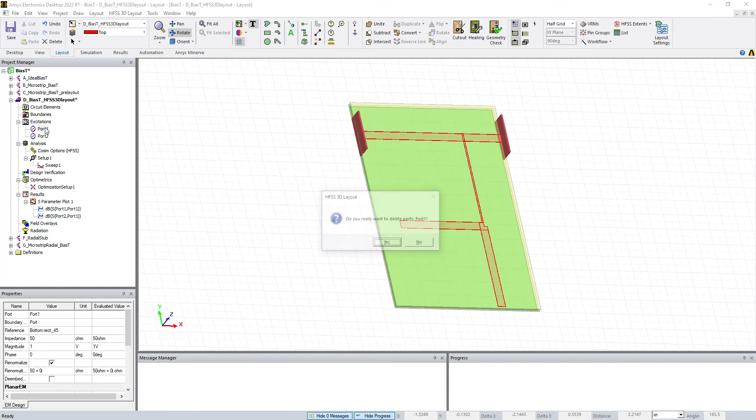Then we're going to need to go back to our ports. Let me just rotate this so we can kind of take a look at them again. So we're going to remove these ports because we're going to add connectors to them. So go ahead and delete the ports.

So now we're back to our printed circuit board. And we need to add the ground pads on either side that we're going to solder the connector to.

And if you had uploaded the personal lib contents to your personal library, so that means if you go to now my personal lib is right here, you should have these guys right here, this MW class, and then you may have thrown this ground pads bitmap into the proper directory.

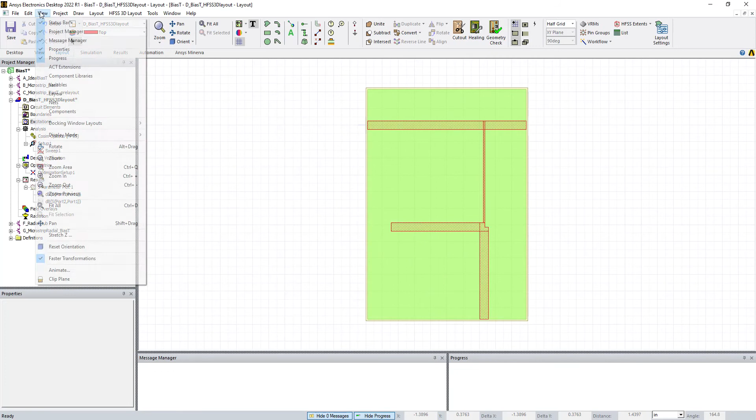If you had done that and we say view component libraries, you should be able to go to your personal library here, personal library, and you see this thing, and you see this ground pads. So I've already gone through the trouble, which was a real pain in the butt, of creating these ground pads, and you'll see how easy it is to add.

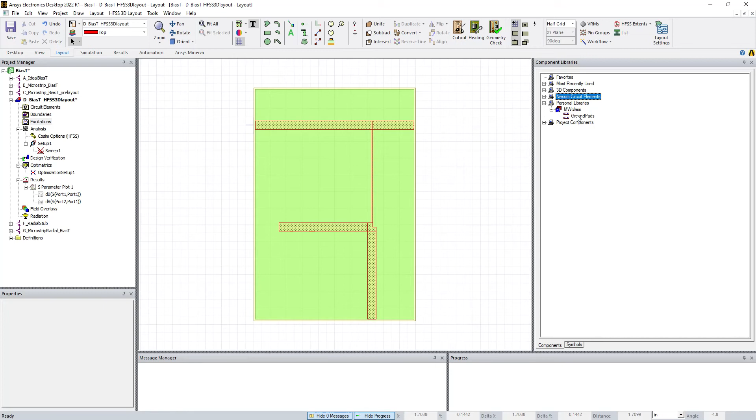So you just double click it like a regular component, and let me just verify our layout settings and snaps are right. So we have display, 100 mil, 50 mil, snapping, vertex, edge center.

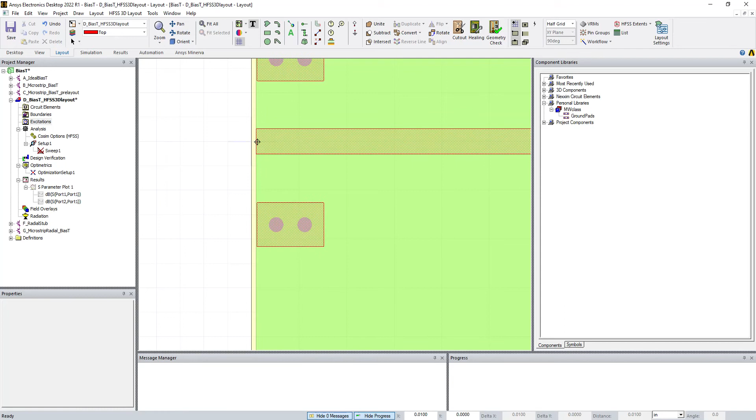All right, so double click on ground pads, and it's going to want to snap right to the edge of the end of the line. So we're looking for the triangle. Where is it? Oh, I almost had it.

Okay, so it snapped right to the edge there, and now you know why I have this connector offset. So this edge of the connector pad comes right to the edge of the board. So we're going to do the same thing over here. Double click on it, and since it's a component, I can hit that R twice to rotate it. We're going to look for it, and bam, that's it.

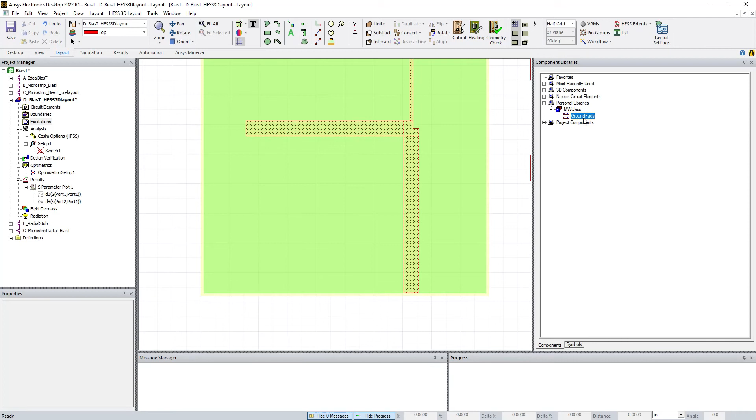And let's go ahead and add one down here too, in case you'd want to add one for the bias port, in case you want to put like an SMA connector there to add for the DC voltage bias. All right, so now Control D is in delta.

There we go. Okay, now we have to add our connector. So here's what we do. This is the best way that they were suggested to do it. So we're going to do the same way.

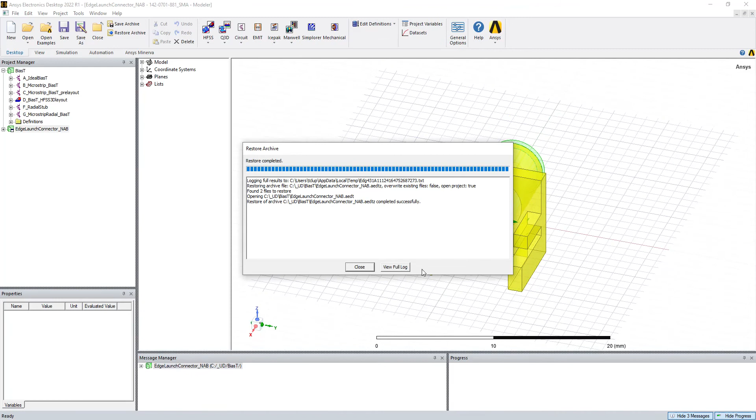So you're going to go File, Open, making sure you're going to go to this archived thing and say Open it, and just say OK for this. It's going to unpack it and open it up as a complete separate project. And say Close, and there's the connector.

So what it did is open up as a separate project. Now I've gone through and already generated this from basically from scratch, from dimensions and the data sheets. And we're not going to discuss too much about doing three-dimensional HFSS modeling in this class.

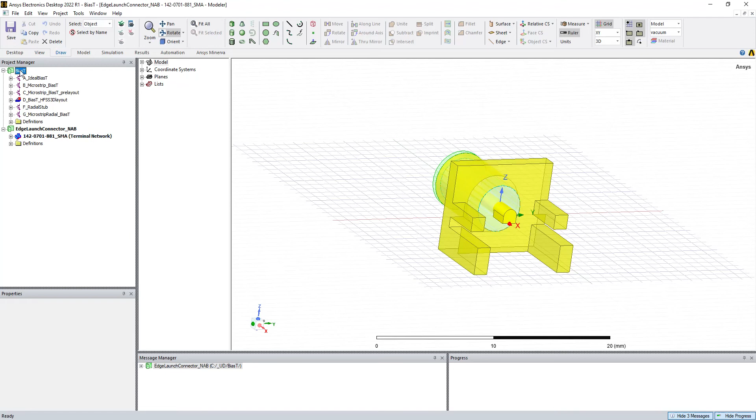So what I want you to do though is go over here, and this 142, this guy right here, you're going to click on it, right click and say copy, go over to your bias T and right click and say paste. And what that's doing is pasting it into your project, since this is a separate project.

So now you can go back and close this one you had just opened. This is the easiest way to incorporate this connector into your project, and now we have this connector in our project.

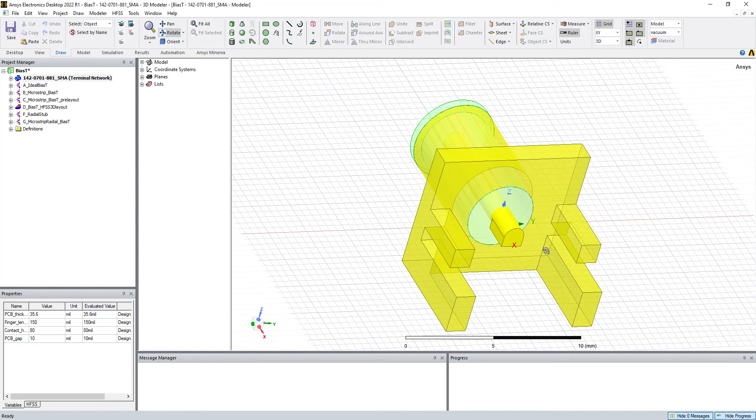So we have these lengths for the ground tabs, and we have this little feature here, something I added to kind of simulate solder going down to the center conductor. Again, I'm not going to talk too much about that.

Let's go ahead and close all of our windows, and go back to our 3D layout. Double click on that. Now we're going to add the connectors to it. The way you do this is you just click on this and say copy, Control C, come down to your layout and go Control V or paste, and just say OK.

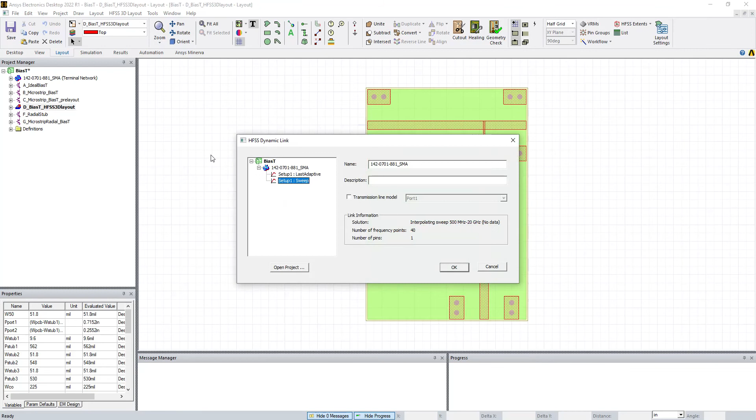It should paste it to the 0, 0, ironically, which is where we want the first one, right there at 0, 0. So we're going to do the same thing again: Control C, then Control V for paste.

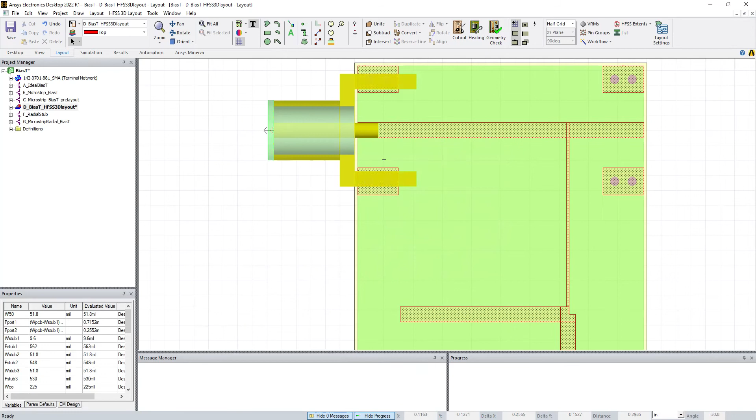Let me zoom out a bit here. And we're going to need to rotate it. It's not where I want it.

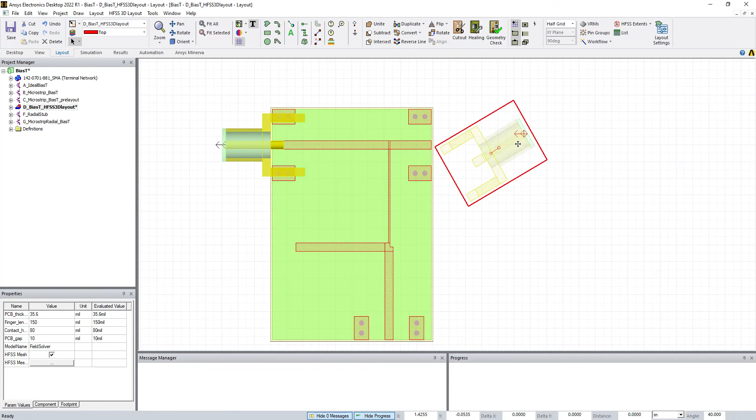Here we're going to hit Control R to rotate it around, and we're going to drop it on the edge of the board. See, it's too far over. It should go right there. Now we can check the footprint to make sure that it did, yep, so put it at 1 inch and 0.

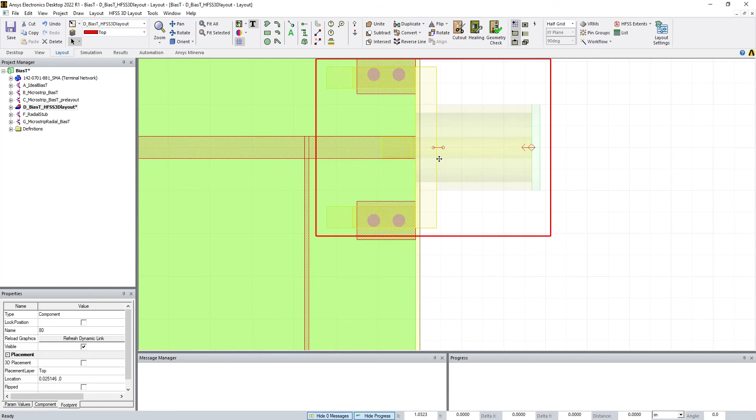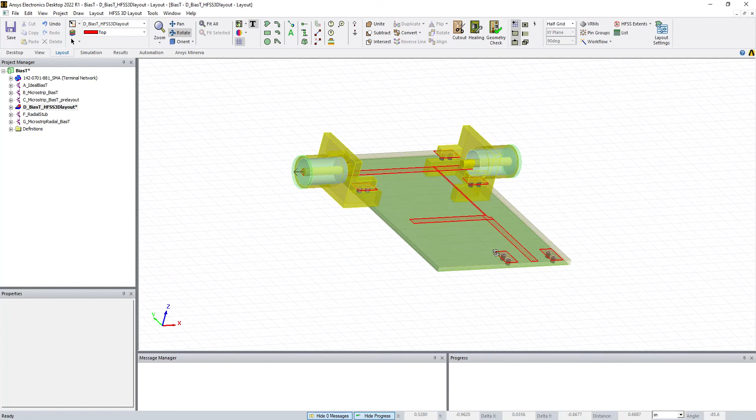Okay, there we go. So you should see the little dielectric gap right between there. Control D. And if you rotate it, you'll see the connector attached to your board, which is kind of neat. You also see the ground vias that are there. They all came with the component placement.

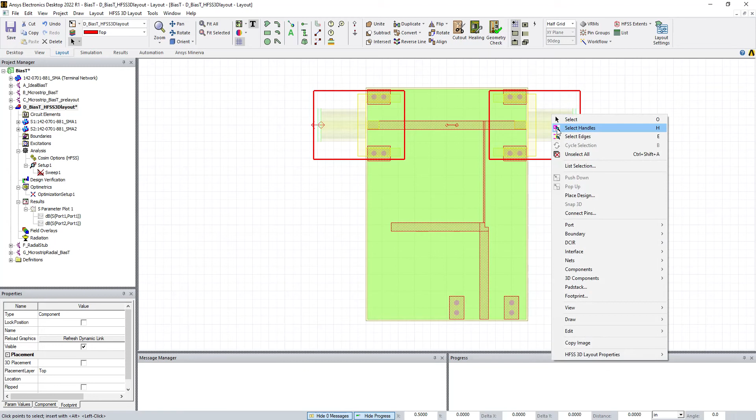And now we are ready to add the ports. So what we're going to do is now we have to add the ports. They're going to show up at the end of the SMA connectors. So what we do is we click on each connector, right click, go down to ports, and say create ports on component. Now this only works if you've already created the component such that it will accept a port on it, and I've already done that. You click on no net and say OK, and now we have 2 ports on the edges of the connectors, so we're all set, ready to go.

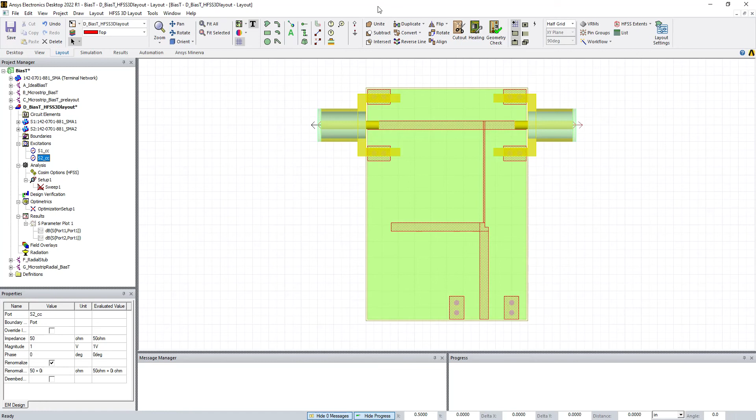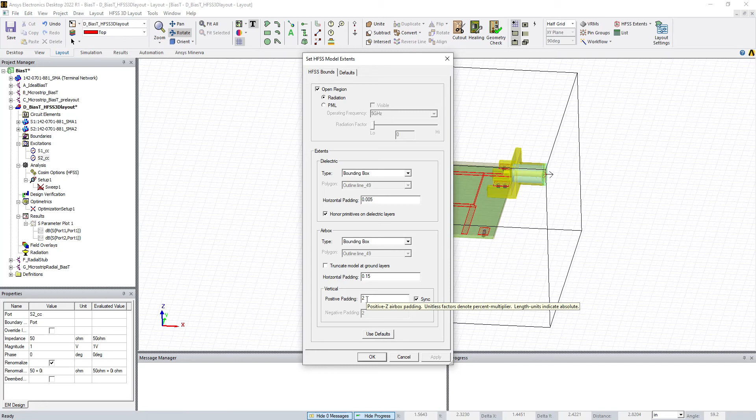We can look at the HFSS extents to see where the air box is now. So the air box is there, it's a little big. If you wanted to, you could probably change this to 1, or the positive padding, change that to a 1 if you like, but I'm just going to leave it the way it is for now. That just gives you an idea of what the actual simulation space is.

And now we should be able to go ahead and run the simulation. So let me just take a look at the sweep, I think I still have it. I put it at 10 megahertz to 4 gigahertz, so we're going to do a full sweep. I'm going to pause the video while I do that.

So again, you just click on Setup and say Analyze, and it should go ahead and do the full 3D analysis, and I will pause the video. Okay, the simulation is done, so let's go ahead and take a look at the output.

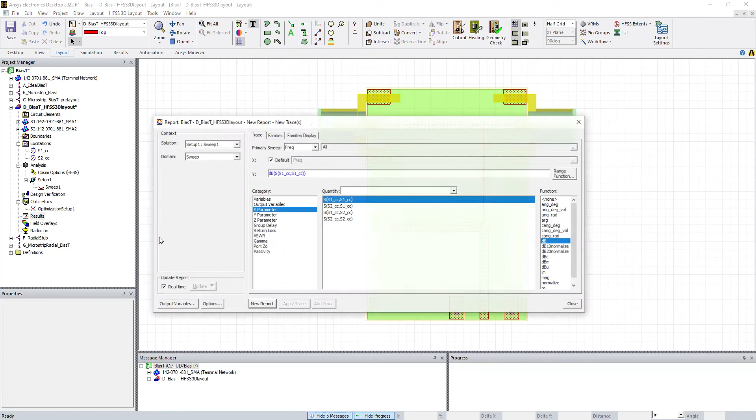Now, these are from the old S parameters, so we're just going to delete this plot and create a new one, a standard report. So you have the new definitions, the new ports are there, so S11 and S21.

And of course, it didn't change much because the connectors are well matched, but it just gives you an idea that you can actually do a full 3D simulation, including the connectors, in your project. So this is the final result, this is what you should see when you solder the connectors on and do your simulation.

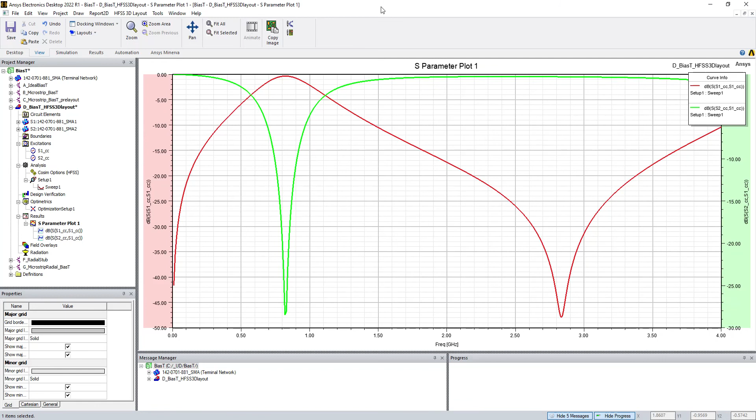The actual board would look like this when you solder your connectors on, and eventually you would attach probably another connector or just a pair of wires to your power supply to add the biasing to it. So ultimately what we have here is a transmission line that goes from one connector to the other, and this little circuit here lets us apply a DC voltage to this line without influencing the RF path insertion loss of this line.

Now, it kind of goes without saying that normally you would have a DC blocking capacitor on one side or the other. We don't in this project. You can actually buy for about 20 bucks a nice SMA pin to socket DC blocking capacitor packaged up if you wanted to go ahead and use this in an actual circuit.

Okay, so that's the connectorization part of it. Now what we're going to do is create the Gerber files, and if we did everything correctly, it should go pretty straightforward. Let's do this. I'm going to say View Layers, and in the top layer I'm going to turn off the components by doing that.

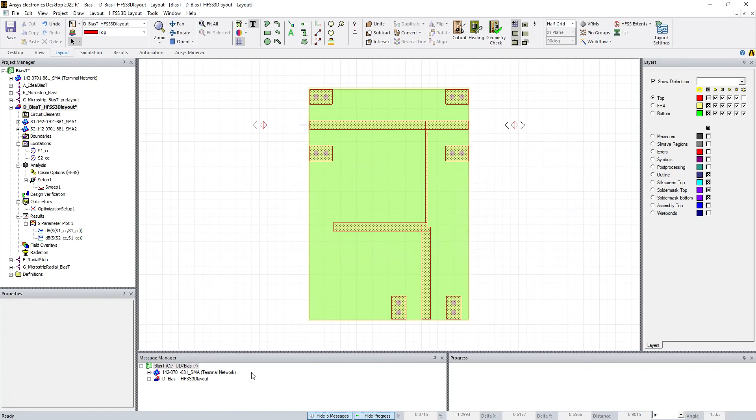Then what you're going to do is go to File and Export, and first we're going to export the drill file, which is all of the vias, so that's the NC drill, and we're going to put that in our directory. I'm going to delete all this other stuff and just keep the NCD file. You just leave the defaults as they are, say OK, and when we go to our directory we should see this file.

So here's what we got to do. We need to change the names of them so OSH Park can bring them in directly. So all drill files you're going to change to any name and .xln.

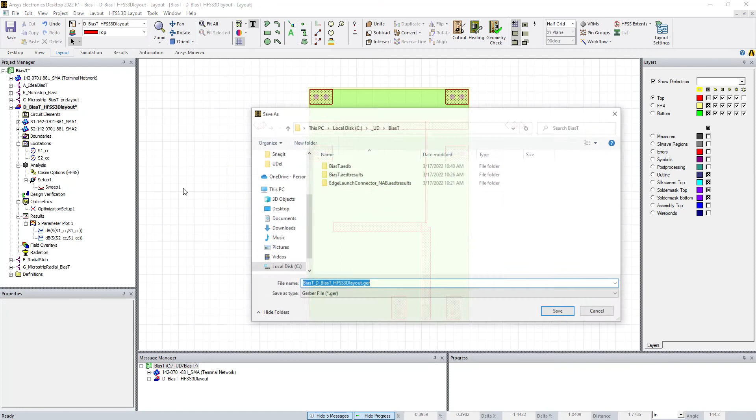So now that's our drill file, and we're going to go back here and say File, Export, Gerbers. Same kind of deal - get rid of the rest of the stuff and just say bias T Gerber. Now when you do this, a little window is going to come up, and here's what I'd recommend doing. Just go ahead and delete all of these, and we're going to start fresh. So what we want to do is export.

So one, let's make this the top silkscreen layer, silkscreen top, and then two will be the top solder mask. Then three will be the actual top layer, four will be the bottom layer, five will be the bottom mask, and then six will be the outline. Okay, so kind of going from top to bottom, it'll be silkscreen top, solder mask top, the top layer, and then the bottom layer, bottom mask, and finally the outline. Just say OK.

And then we go over to our project, and again we have to rename them. So the top silkscreen renamed to GTO. The next one, which should be the solder mask, the top solder mask, would be GTS. The next one should be the top Gerber file, so .GTL for top layer.